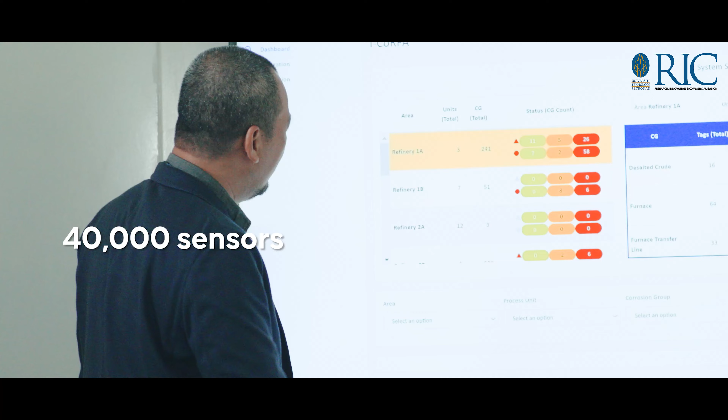Our successfully developed digital solution includes Domain, a customized big data analytics predictive tool to predict machine failure at the oil and gas platform, processing real-time data input from 40,000 sensors, with the ability not just to predict accurately when a particular equipment is about to fail, but also what caused the failure or trips to happen. Moving forward, we fully embrace the philosophy of data as the new oil, achieving cost avoidance and enabling self-regulation for operations via data-driven digital solutions and decisions.

The value that the predictive analytics domain provides is a fast solution given the amount of data that we collect from the machine. The advantage that we get is a timely failure prediction in order for us to deploy the intervention, i.e. the prescriptive analytics.

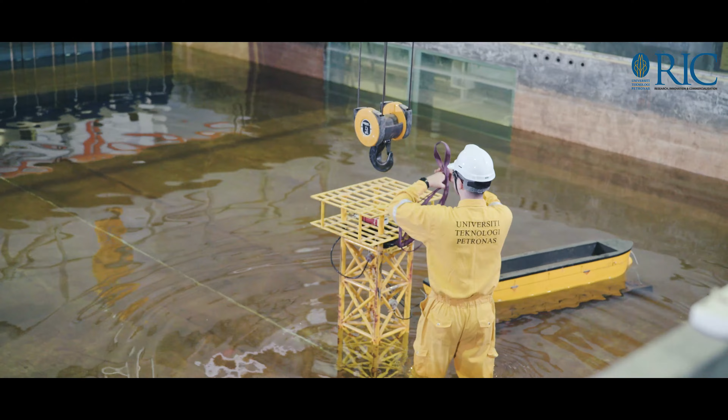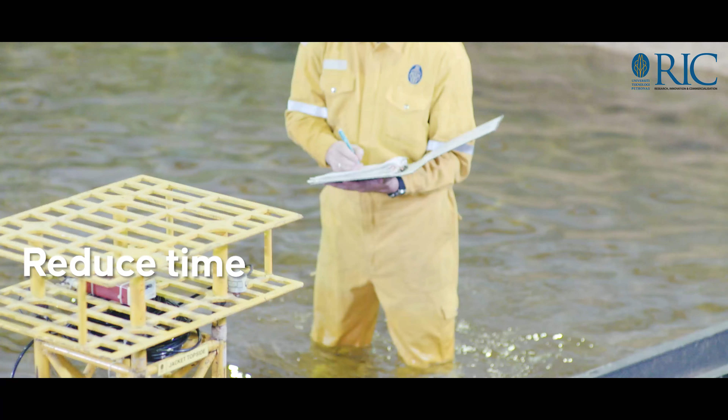Poseidon is a technology that we've developed in-house at UTP through our partners Poseidon Solutions, to deploy a system that is able to be the eyes and ears of offshore engineers on the structures itself, so that they can monitor the structures offshore, tell you what's going on in the structures, tell you how much remaining life is on the structure, and at the end of the day help you make decisions better, reduce cost of operations, reduce time spent during inspection works, and ultimately create cost savings for the clients.

Ultimately, I'm very proud of this because we have a long track record in Malaysia of delivering such solutions. At the end of the day, we want this to be a homegrown solution, something that we can be proud to say is a homemade product of Malaysia, and something that can be exported throughout the entire world.

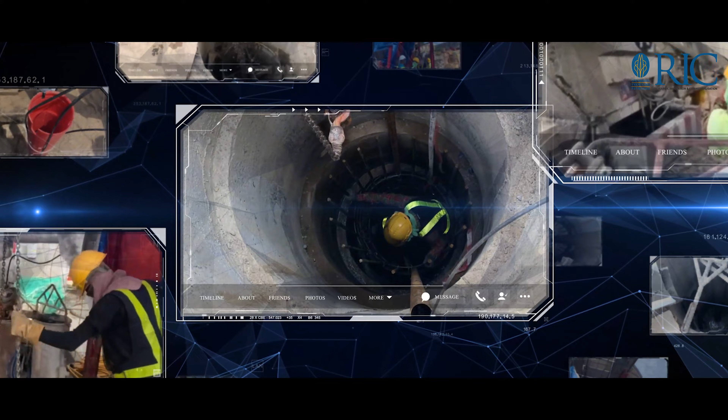The fiber optics technology is integrated by sending signals of light into the pipe, and then it measures the bending of the pipe. It has the advantage of measuring many points, and is more superior than the conventional system because of its ability to measure in real time. It enables informing stakeholders and the public on the safety of landslide incidents, and is therefore very useful as a landslide monitoring system.

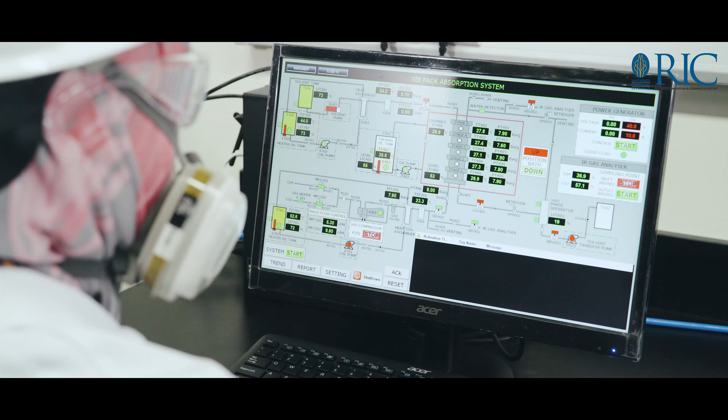The compact absorption system allows up to 95% of load reduction and 50% of footprint reduction as compared to conventional packed absorption systems. We have a bench scale system to test various mixed gases of up to 40 bar pressure to meet industrial needs. We are capable of simulating the process and scaling up the developed technology using Aspen HYSYS process simulation, and conducting techno-economic analysis.

CISIO at UTP develops Compro, a product solution based on productivity nominal analytics. It provides nominal values for productivity estimations. As a result of Compro, we now have a more consistent and accurate plan in achieving construction projects on time, on budget, and on scope.

In collaboration with our partner Petronas, UTP embarked on phase 1 of the reefing project, which served the objective of developing a high-level asset-wide study of offshore platform decommissioning. The project corroborates UTP's commitment to support Petronas' initiative to drive the cost of abandonment as low as it possibly can via R&D.

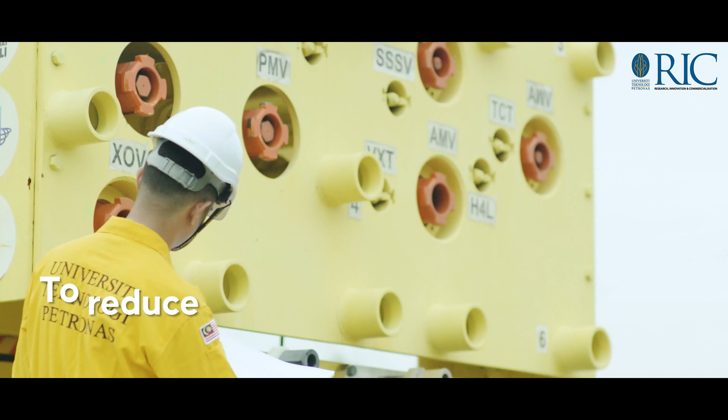Specifically, the project supports MPM asset decommissioning's key target to reduce decommissioning costs by an estimated 28% through multitudes of efforts and to mature the concept of reefing in situ and ex situ. The main objective is to assess the feasibility and suitability of oil and gas structures in Malaysia to be reefed, either in situ or ex situ, with research on ways to enhance the reefability of structures.

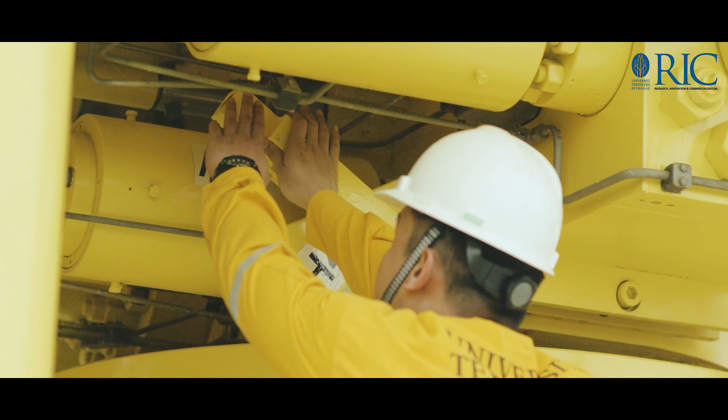Petronas is proud that this initiative had provided an avenue for gathering academia, in-house technical experts from GTS, GR&T, as well as asset operators in maturing the science and engineering related to rigs to reef, further amplifying the resolve to execute more moving forward.

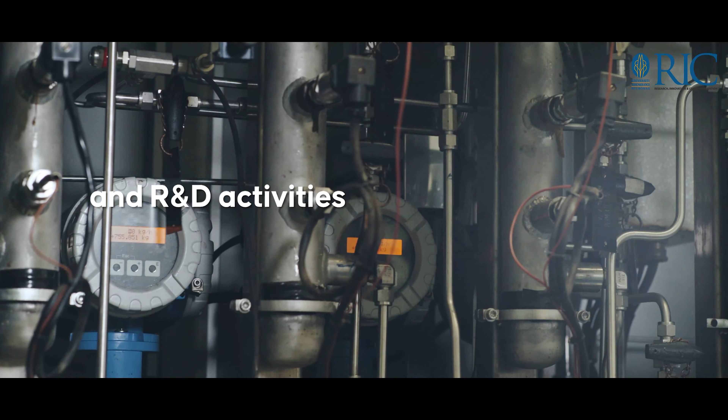At the moment, there is no commercial software available to gauge the lifespan and predict the performance of hollow fiber membrane. Therefore, UTP invented HFMPP in 2013 and commercialized it in 2014 to several prominent oil and gas companies to support their operational excellence and R&D activities. It is estimated that our client has saved at least 3 million ringgit by using the software since 2014.

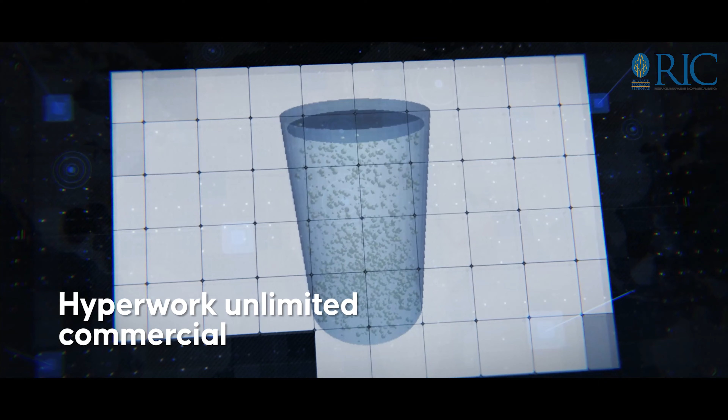The UTP Altair Center of Excellence for Applied Scientific Computing offers unlimited access to the Altair HyperWorks Suite, which enables students and researchers at UTP to carry out engineering simulation for research as well as consultancy work. More than 50 engineering software covering CAD and preprocessor, structural and CFD solvers, electromagnetic solution, as well as discrete element method software, is now available for researchers to serve the industry.

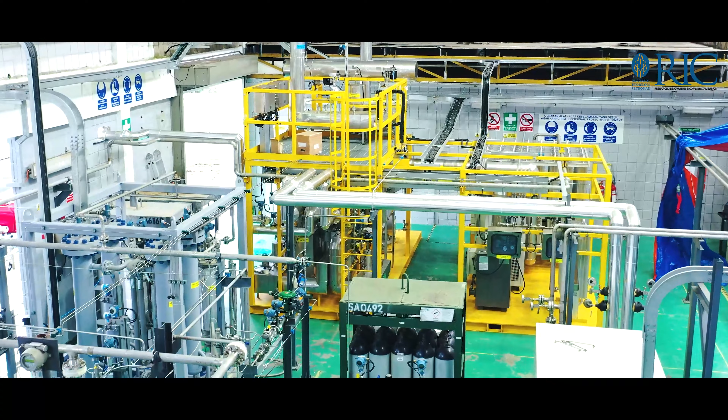The gas flow loop was developed in collaboration with Petronas GRNT to mature low temperature CO2 capture technology from natural gas up to TRL6. This is the most comprehensive low temperature closed loop pilot gas testing facility in the world. The flow loop has the capability to test with mixed gases of up to 2.4 million standard cubic feet per day, very low operating temperature down to minus 75 degrees C, and high operating pressure of up to 40 bar.

This flow loop has successfully tested the crystallizer and blowdown technologies, whereby the ongoing projects are performance testing of cryo, LNG, and MPAC technologies.

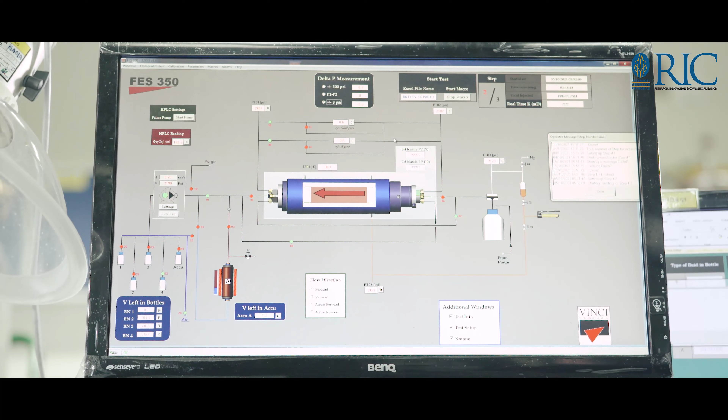We specialize in studies to improve the hydrocarbon recovery and productivity of reservoirs. This equipment is used to simulate how fluids move in reservoir rocks. The results obtained from this equipment allow us to know how much oil can be recovered from the reservoir rock, or what caused the oil production to drop. This equipment can withstand corrosive fluids and is able to operate at high pressure and temperature, similar to conditions in the reservoir.

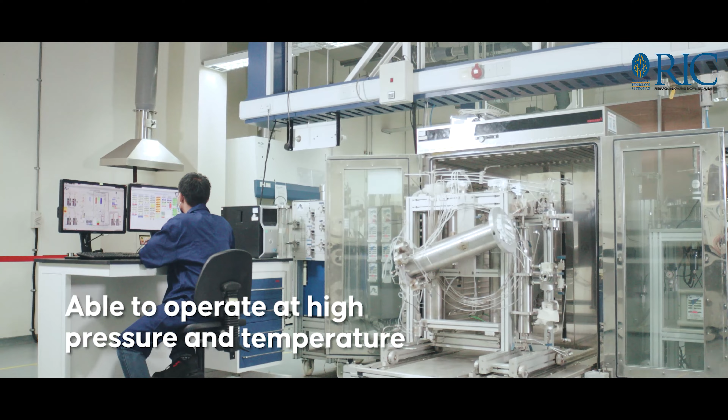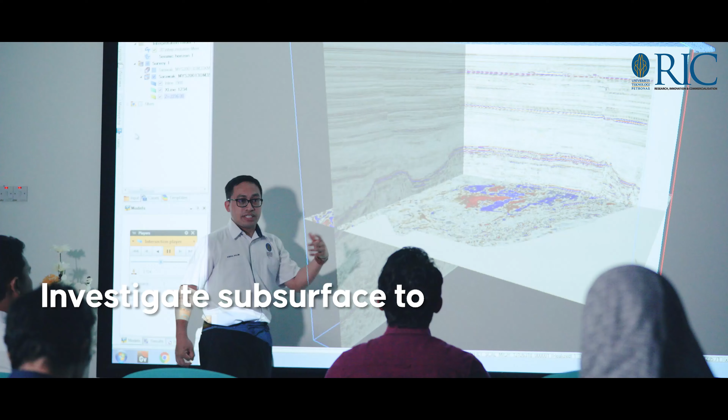We are going to optimize resource exploration through machine learning, deep learning, and also artificial intelligence methods. We are determined to investigate the subsurface to give clients optimized output with minimum time required to achieve the optimum solution. Our research is targeted to enhance seismic image capability, eventually leading to optimized subsurface imaging and minimizing the cost required for the whole upstream oil and gas operation.

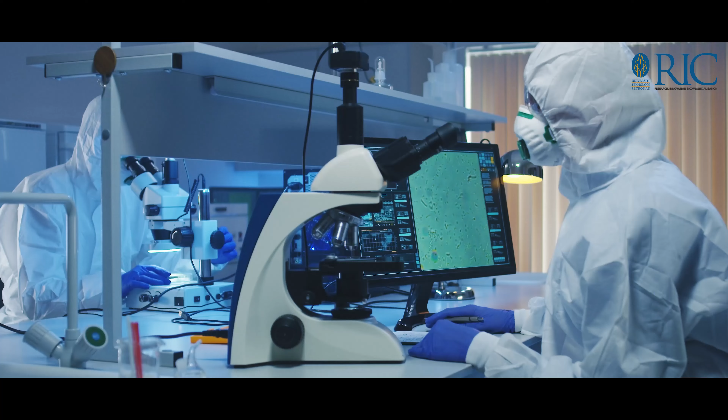Our research in terms of digitalization, its utilization, and how we present that to the industry to help them look at their issues, has actually spiraled in terms of the revenue we gain. This has been one of our proudest moments, because this digitalization involved the engineering part of it, the big data part of it, and also the way we wanted to operationalize our operations for the industries.